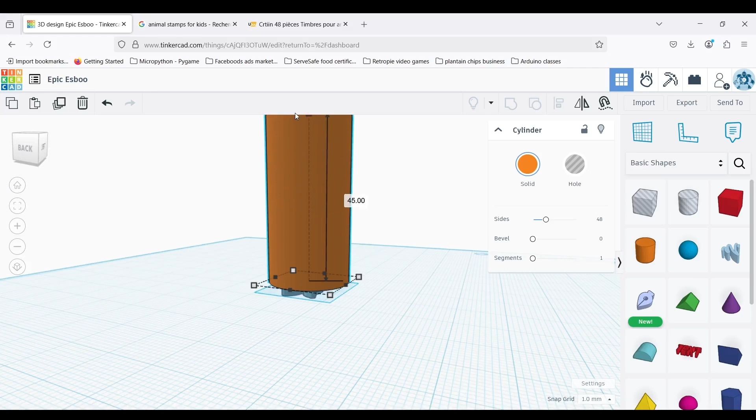Alright guys, so you're gonna have this interface. You're gonna click on create here. You can create and you pick 3D design, and you just wait a little bit. We get there, no worries guys, we get there.

Okay guys, so we have that, and this is how it's going to work. What we try to do, let me click on top here. What we try to do, we try to make a bunny shape, or you can make an egg, but a bunny shape is funnier. So you click here, you have all the basic shapes here, you click on scribble and you click on the board and it will bring you here. And you do a bunny shape, so I do it like this.

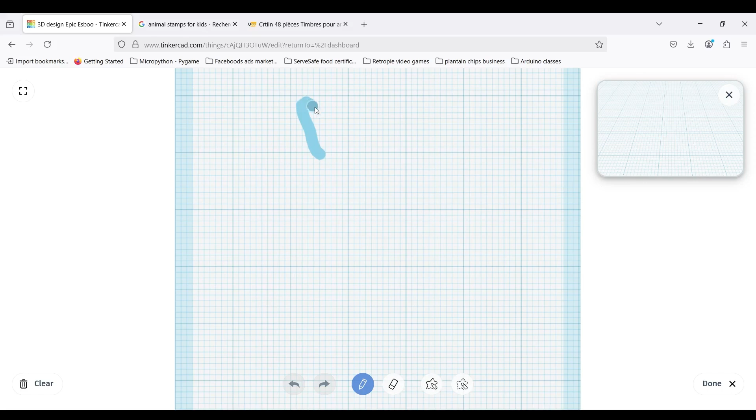It doesn't look like too much of a bunny, it looks more like a fox or something like that. Alright guys, but forgive me. So we're gonna have a bunny, a fat bunny. Legs of the bunny gonna be like this. We're gonna do the tail of the bunny. This is our bunny. Alright guys, so that's the hand of our bunny.

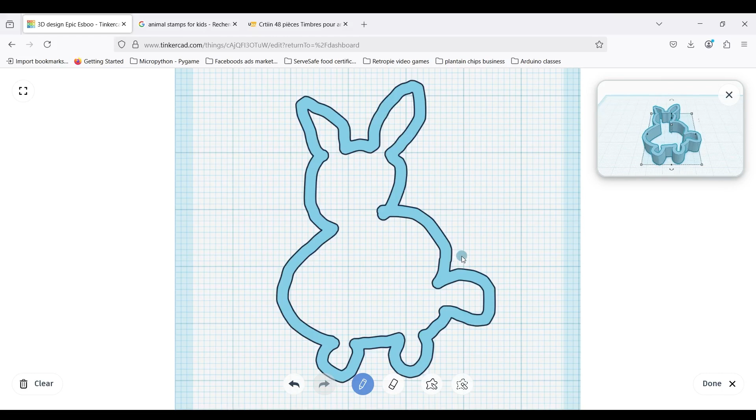We click on done where we're done. Alright, so now we're back at our first board. Scroll down, click on top. Let me zoom out, and this is what...

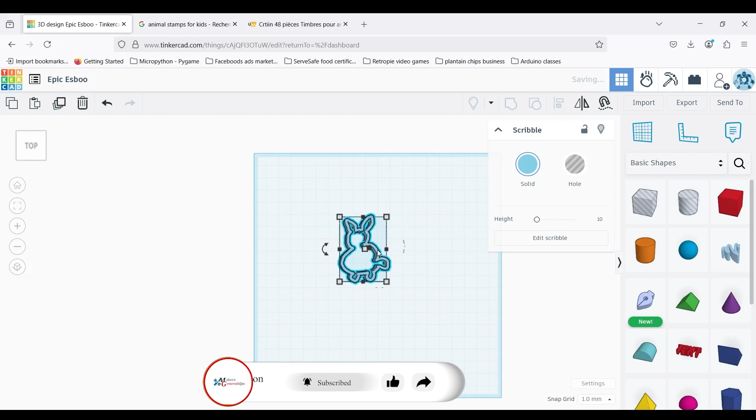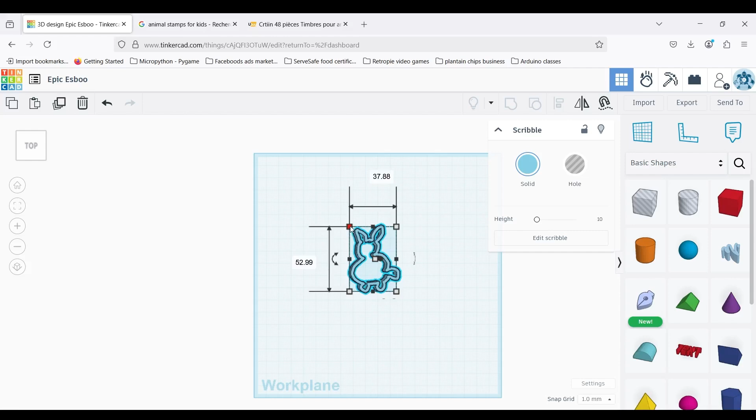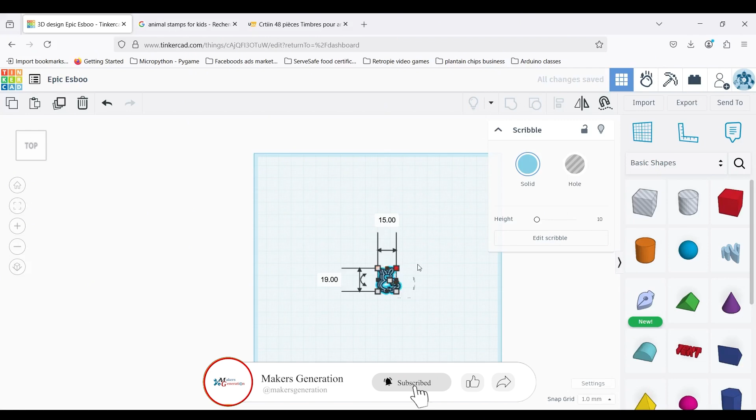...the bunny looks like. So what's the length of it? 37 by what? Let me see. 37 by 53. Okay guys, so what we can try to do, we can try to reduce that shape, something like that. We can try to put it on, since it's in millimeters guys, I forgot to mention that it's in millimeters. Put it on... alright, put it on something like that, 19 by 15, something like that. Okay, this is what it looks like.

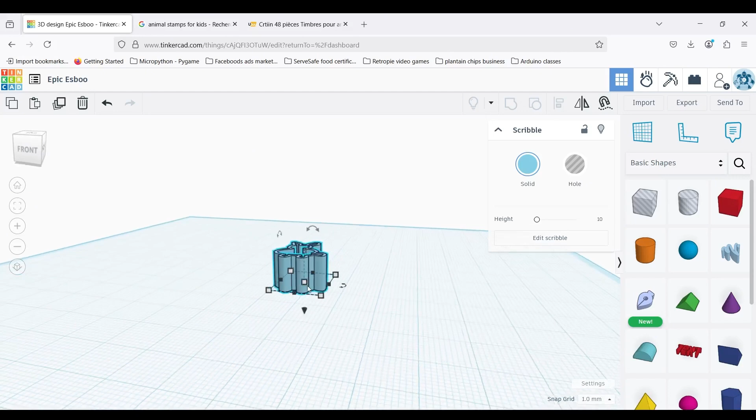So what we can do, we can try to put it in front, move it aside, move it like this. And we can try to reduce it, this 10 millimeters, let's reduce it at like 2 millimeters. So we have something like that, or even a bit higher. I'll explain why, 3-4 millimeters.

Okay, so let's change the view. So what's the size of it? Okay, 15 millimeters and 19 millimeters. Okay, now we have the shape for the stamp.

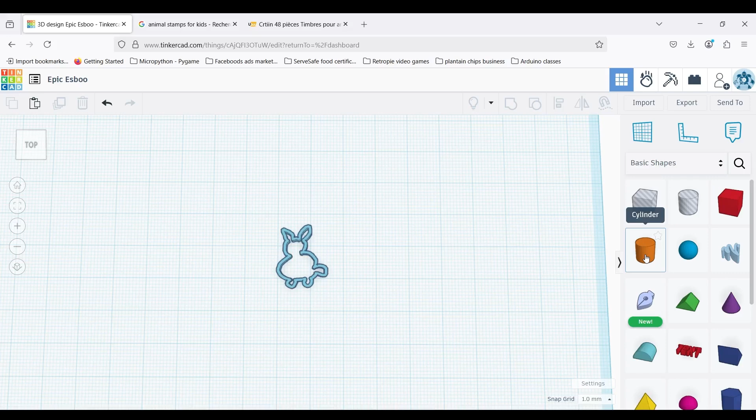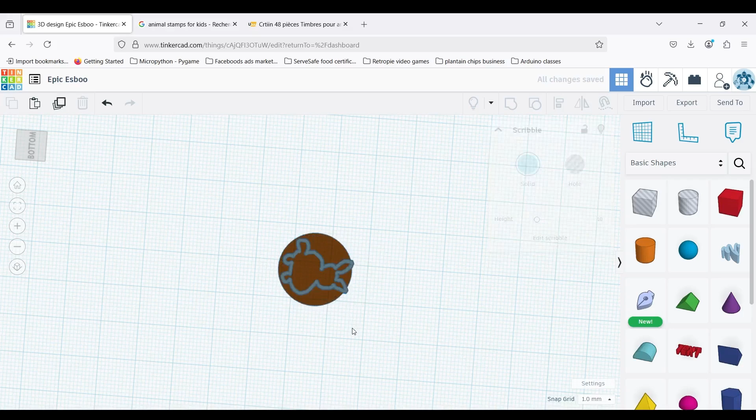We want something to hold it, so we can take something like a box, or we can get something round, like a cylinder or something. Let's try the cylinder. So we can put the cylinder at the top of it like this, so we don't really see it. We say we put it at like 3 millimeters guys. Okay, it was at 3 millimeters. It seems that it's not fully in, so let's see what we can do.

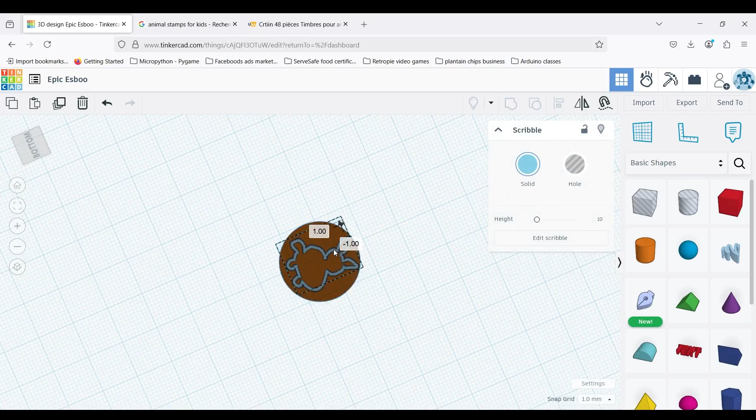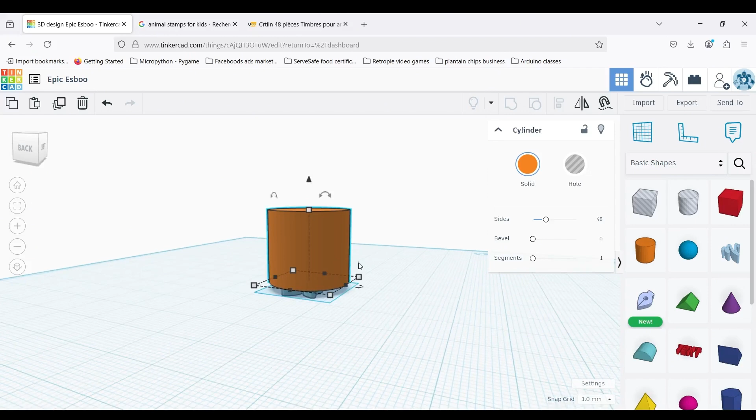We can change the radius of that thing. Alright let me... 22 millimeters, so let's change it. So what we do, we put it just like this. Voila, okay it looks good. Alright, what's the height of that thing? 20 millimeters, about less than an inch, so let's try to put it like 50 millimeters, about 2 inches, something like that.

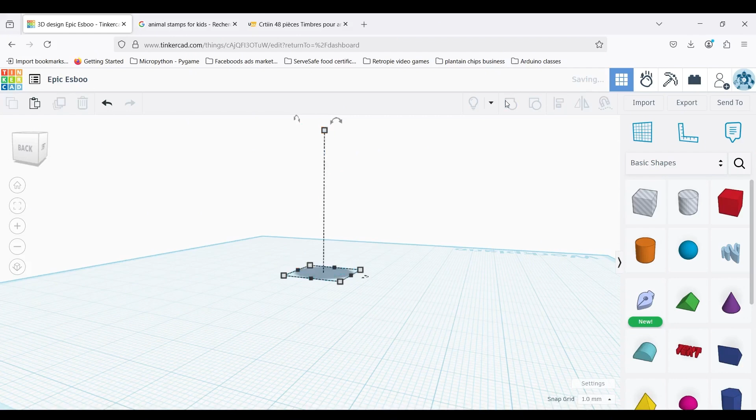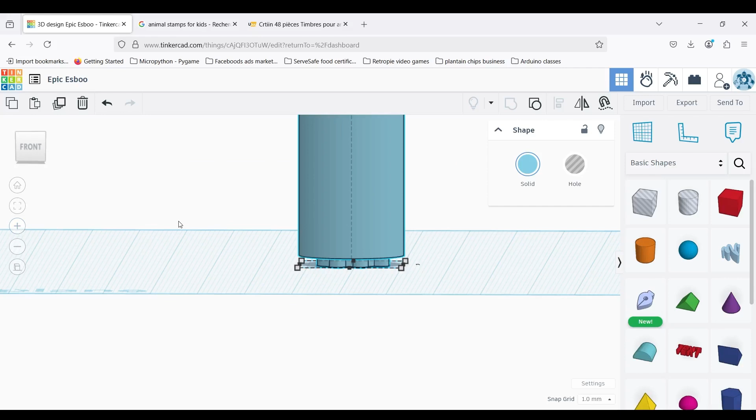So what we do now guys, we want to select all of that and we make it only one. Yeah, there we go. So you want to see what it looks like, let me click on the top here. Okay top, let me change the view. Alright, let me zoom in. It's a bit too much, and what we can do, we can put it on the side. There we go. So that's the stamp here, the stamp is just right here, and we have the holder here, that's a cylinder, it's about 52 millimeters, the whole height, so that's something good.

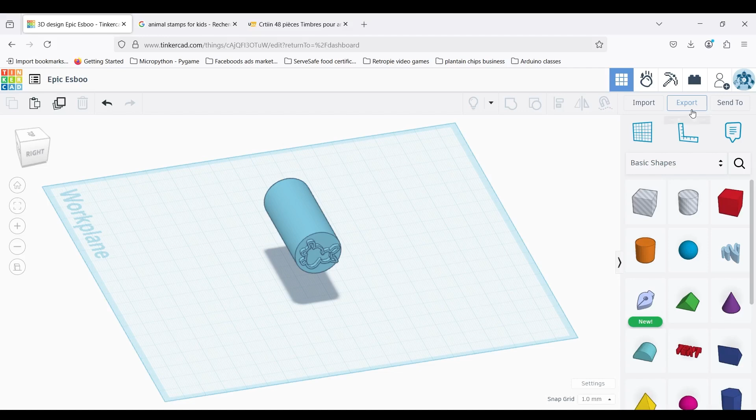Alright guys, now that you have it, you might want to print it. If you have a 3D printer at home, you click on export here, and here you see we have different extensions for the files. So you can click on STL, this is the one mostly used with 3D printers. You click on STL and it will do the job for you guys, and put it in your download file.

Or if you don't have a printer at home, click on 3D print here, and we have a lot of suppliers here that have printers. We can print them there for you, and clean it and send it for you. We can mail it to you. So of course you need to pay a fee, but that's a good way to get started if you don't have a printer.

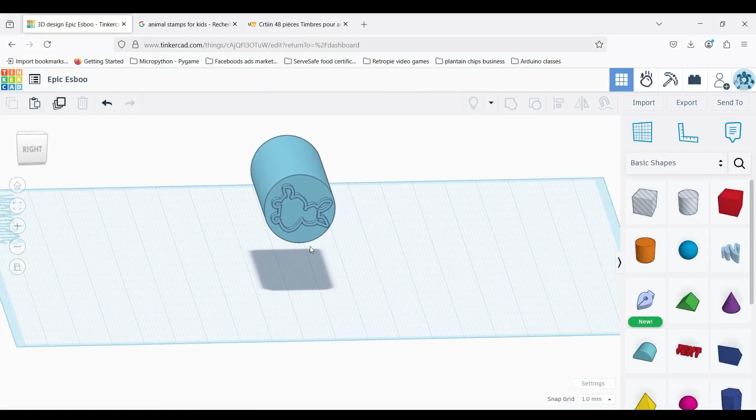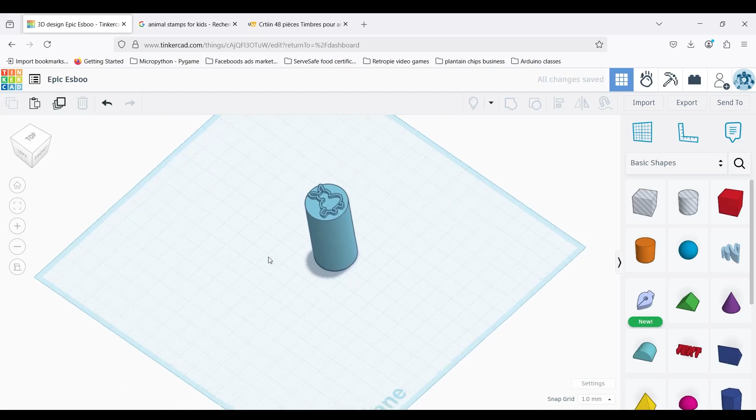Alright guys, I hope you really enjoyed the project, so you can take a look at it, take a look at what it looks like here, so I can see what it looks like. I can change the shape of it. So this is what it looks like from the top. There you go, so you have a nice bunny, so you can get some inks, you know, from Amazon or somewhere, and the kids can play with that. So you don't need to buy one, you just do it yourself, DIY. So that's something we can do at home, so the kids can be proud of it, and have some confidence on what we can accomplish.